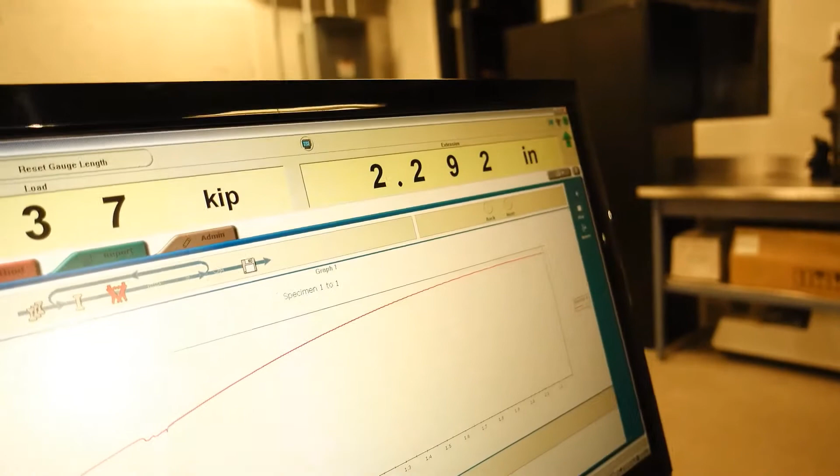And how much stretch do we have? Already 2.2 inches. Yes, 2.3 inches, 2 3/8 almost. There we go. And our kip is still dropping.

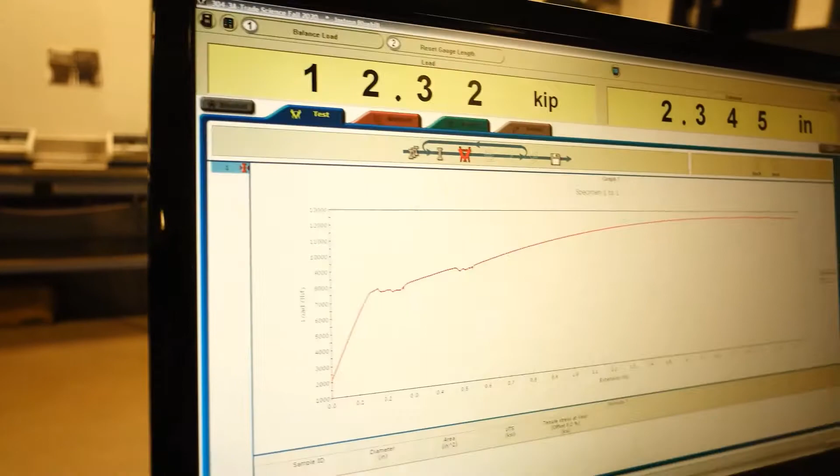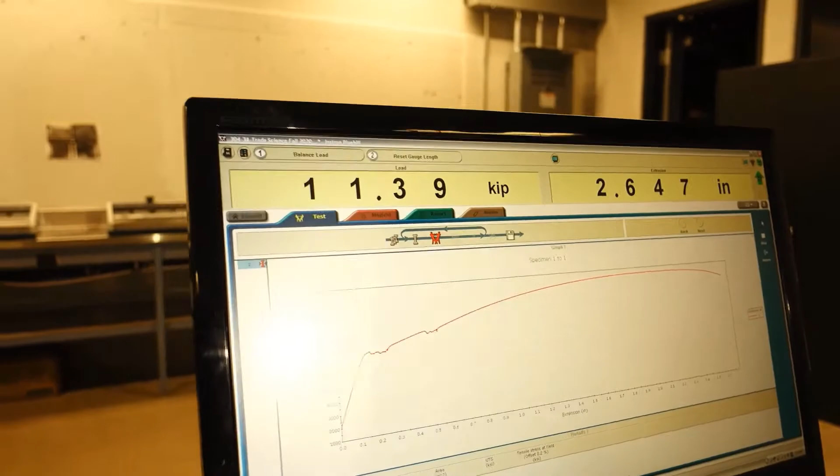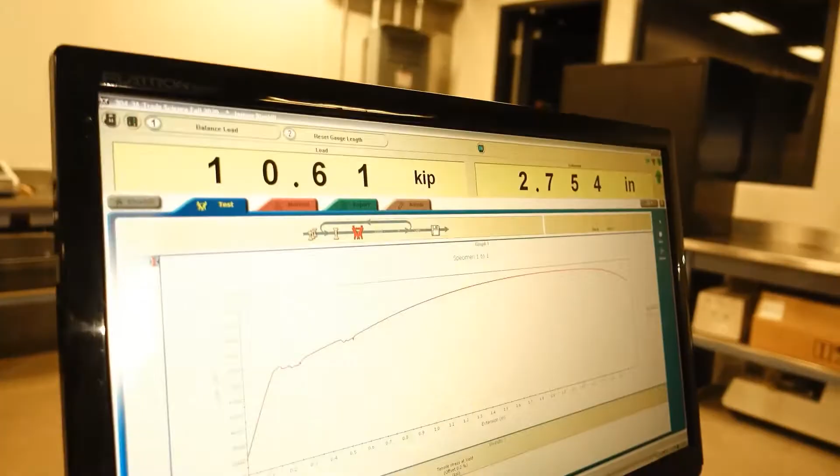You can see our load is going down fairly fast. So let's look at the sample. The sample has already been necked, and you can see the neck there. Eventually, as you can see, the load has already gone down significantly and it's going to break soon.

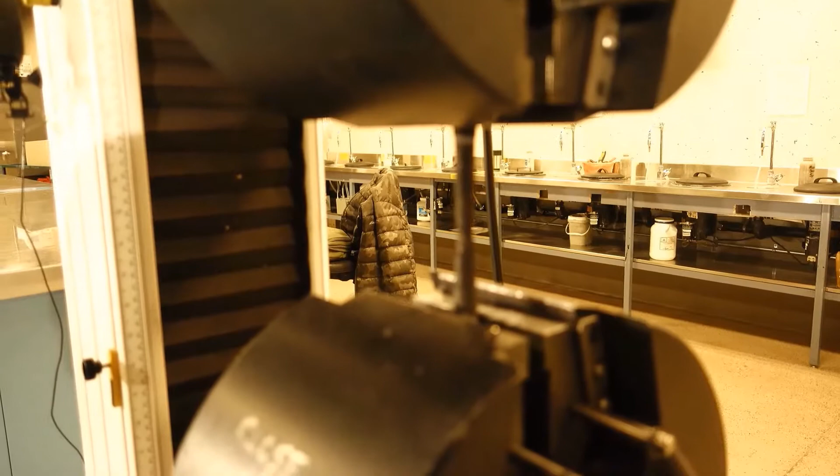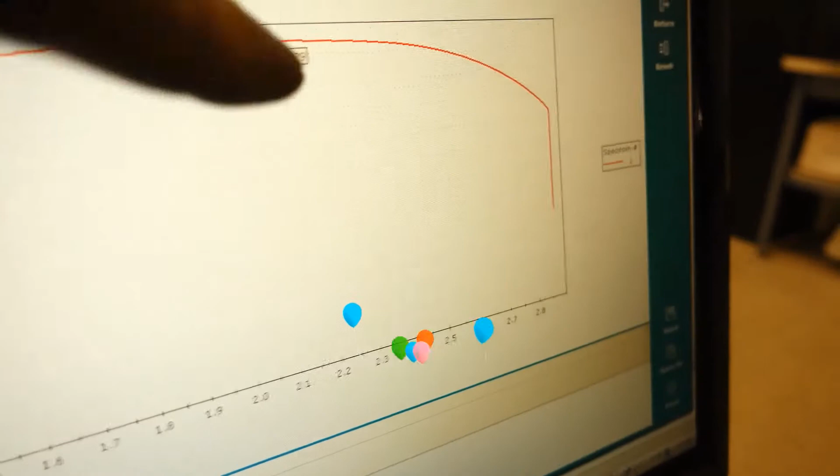So the curve after the UTS, which was the highest load, so the UTS would be basically in here, starts going down, and this is the failure point.

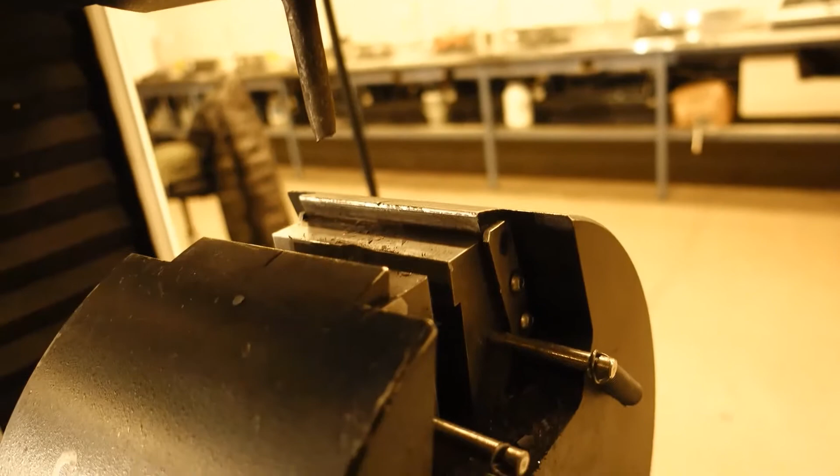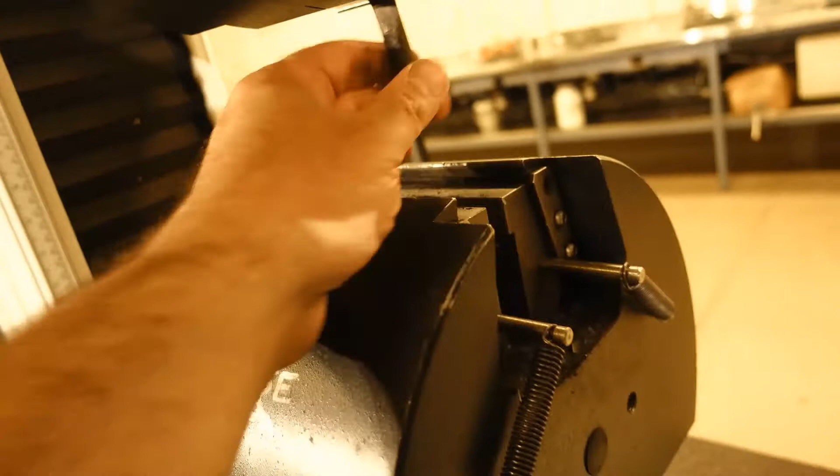All right, so our sample is already broken. Now you can easily see it's narrowed because I can just pull it out simply without even loosening the jaw. This one, the end's a little bit tight. There you go. So this is the fracture surface we have, and we're going to have a look at them.

Okay, we have 3 samples here. This is the original one, and this is one of the samples that we didn't finish, just to show you how much plastic deformation you get after the yield.

So this is up to the UTS. This is how much stretch you're going to get, and after that, as you can see, the material has been necked, and it has been significantly narrowed, and the length has been increased.

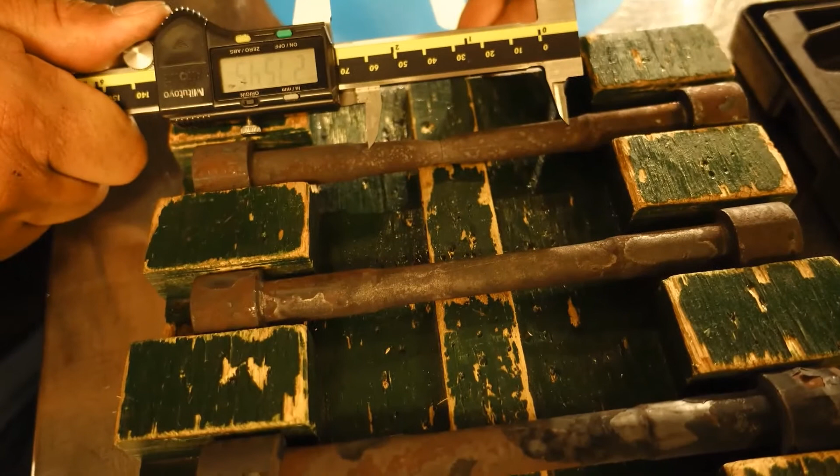So we're going to measure the gauges. I have 1 point in here, 1 point there. So roughly speaking, 2.7545 inches, 2 3/4 inches of stretch. But we already had 2, so it would be a quarter inch, 3/4 of an inch of stretch.

Whereas in this one, 2.449, 2.449, so that at the UTS you get 0.44 or 0.45 inches of increase. At the very end we got roughly 3/4 inch increase.

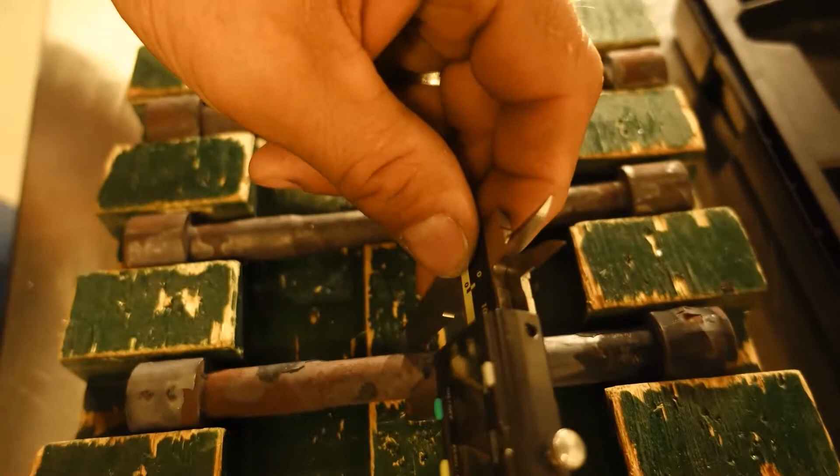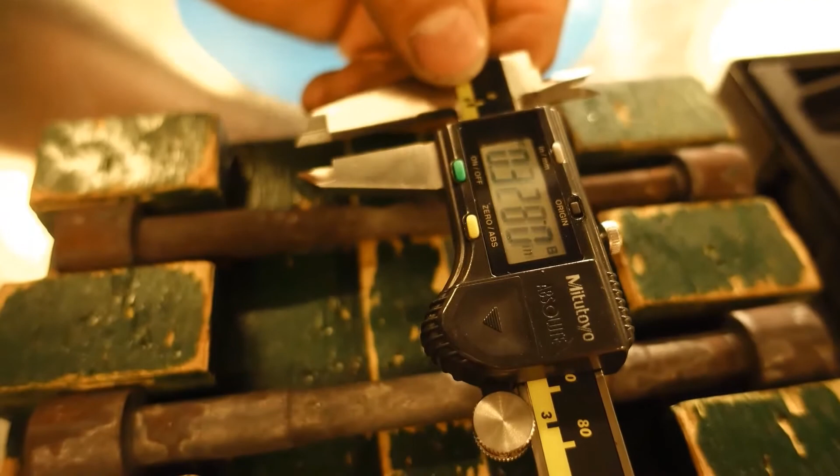Okay, so we also want to measure the diameter. The diameter was roughly 1/2 inch. Now the narrowest part, 0.5010... 0.4525, that's at the UTS, and at the failure point, 0.328. Perfect. All right, so the other thing we're going to have a look at would be our graph.

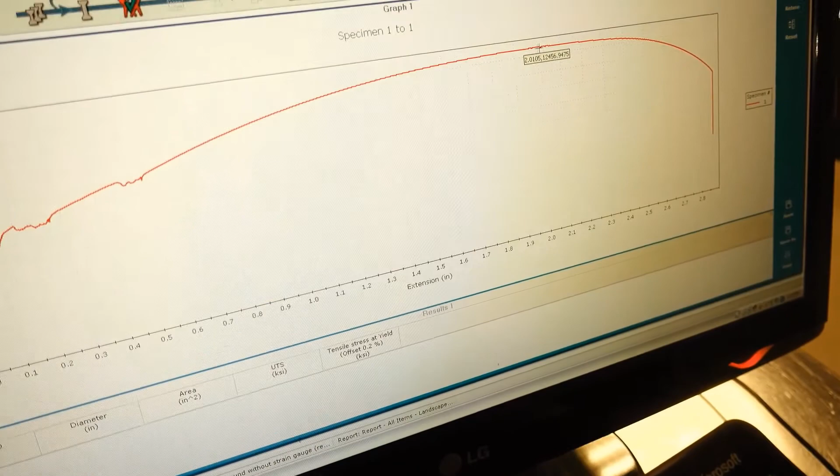So the highest load we have in the graph, as you can see, is roughly 12.5. If you click on print, we would be able to get the result. We can do landscape, okay. So as you can see, roughly speaking, I think our value is close to 12.5 thousand pounds. So 12,500 pounds is the maximum load these samples can handle.